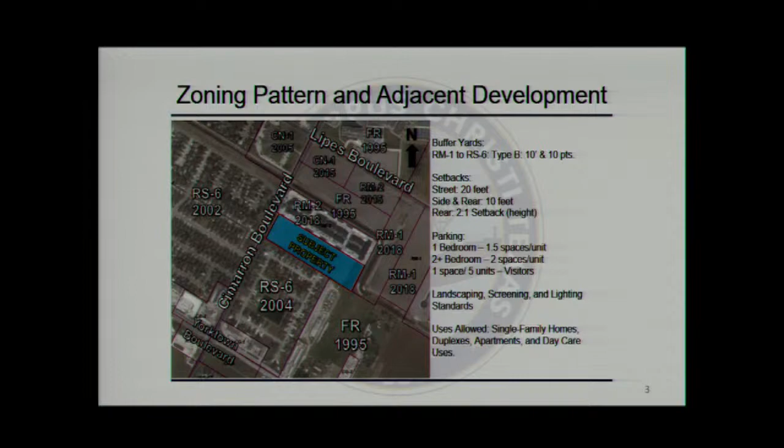As you'll see on the adjacent properties, there were several previous rezoning cases in the neighborhood to some level of multifamily zoning, starting back in 2015. There are adjacents done in 2018, and the most recent is the property to the north, also rezoned in 2018.

As for land use, the proposed future land use is medium density residential. So if Planning Commission recommends, and ultimately if City Council also recommends, it would warrant a change to the future land use map, as you'll see on the existing side, to high density residential.

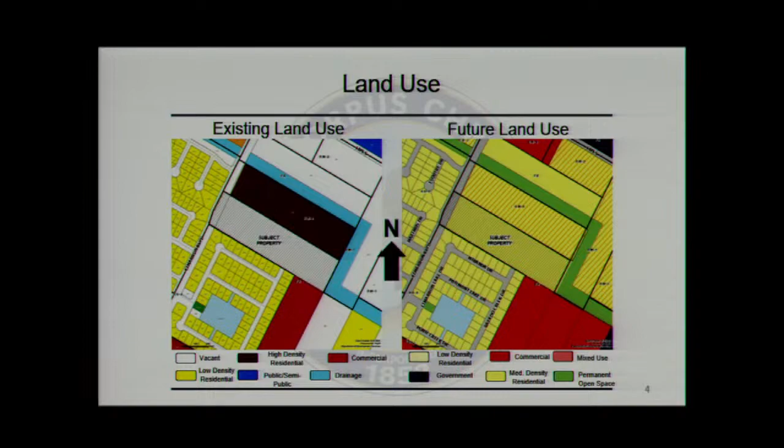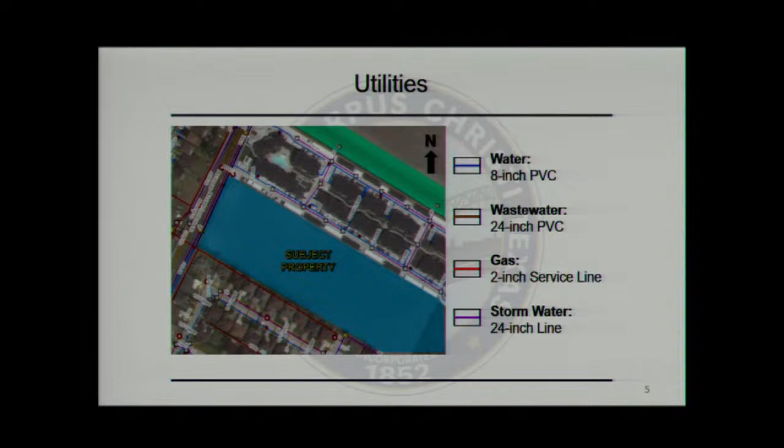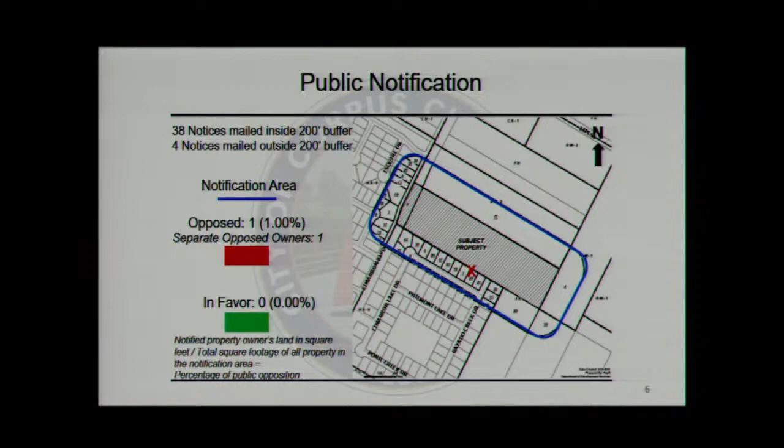As far as utilities, all utilities are available and all are accessible from Cimarron Boulevard. As far as public notifications are concerned, 38 notices were sent out. We received 0 in favor and 1 in opposition as of this afternoon, which consists of 1%.

Based on the information submitted and after staff analysis, we are recommending approval of the rezoning to the RM2 multifamily district. And if there are any questions, I'd be more than happy to address them. Thank you, sir. Are there any questions for staff at this time?

Commissioner Dibble? On the notice, Andrew, that was sent to the residents, I've heard feedback from a few of them that, I don't know what the time schedule is on when they're sent out, but they started getting them last week, and I don't know how quickly people are checking their mail, but have we always had the same timing on what date these go out?

Not this case, but any zoning case in general, I guess. Yes, they're roughly sent 16 days in advance of the hearing before Planning Commission. I do understand there's at times delays with the post office, but it's always the Friday before the packet day. So essentially, winding the clock back 2 weeks, that is the date it's sent to meet the 16-day requirement, which is also set by state statute.

Now, the other thing was, it was brought to my attention, that the time on the meeting was incorrect. Because I'd heard that, I know we have changed this meeting recently to 6:30, but I think what was in the notice was a different meeting time, and I'm wondering, I think that still had the time as 5:30.

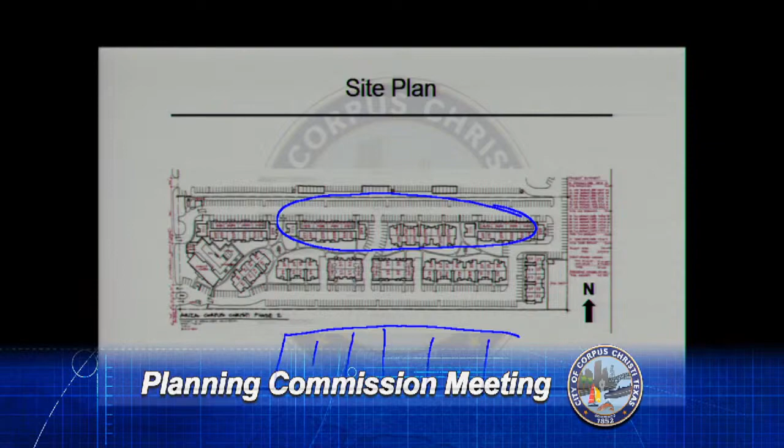60, I'm sorry. 60 is the maximum height for RM2. So as you see on the site plan, the 3-story units at worst are going to be on this section. These are the single-family home lots that consist of Cimarron Lakes, I should say. So you're going to have a separation of parking, and then you begin the 2-story units.

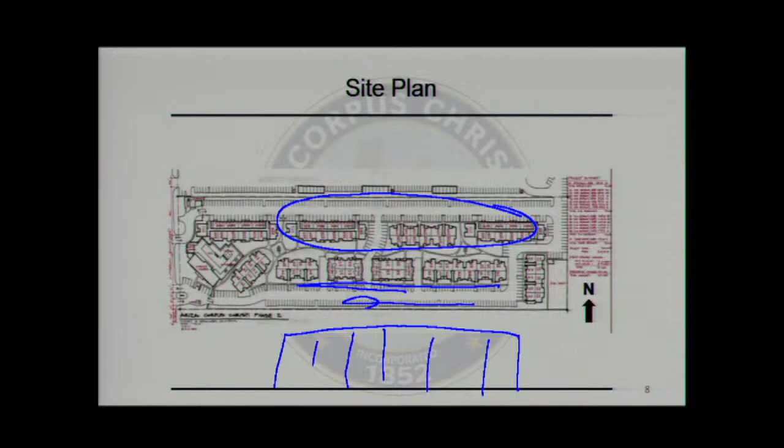Is this proposed plat something that the developer is intending to do, or will there be any changes once they get the zoning, in case they do? This site plan is from the developer, and it does mirror pretty much what was done with the project to the north. There are fewer units.

So how much distance is from the buildings to the property line, where the parking is? So every parking space is roughly 18 feet deep, and your center aisle is going to be 24. So that's, let's see, 36, 60 feet.

Thank you, Mr. Bell. Okay, thank you. Commissioner Dibble? On the site plan though, this zoning case doesn't actually restrict those buildings to be 2-story, correct?

In theory, if we grant the RM2 zoning, they could come back, revise it, and say, we thought we were going to do 2 stories, but now we need to do 3 stories, and they would have the ability to do that. Then they would need to meet those restrictions, or they could sell the site and not choose to build at all. That's an absolutely true statement. Zoning never binds you to a specific site design outside of a PUD or a special permit. In some cases, somebody achieves a zoning, sells the property, decides to go a different direction, or as you said, they may change their design, but that means they will have to meet the 2-to-1 setback.

It sounds like the developer's saying they're going to do 2-story. Could we put a restriction that says no higher than 2-story on the ones that butt up to the property line? It would be only through a special permit. You would essentially have to grant a change of zoning to either leave it FR or RS6 and then add a special permit to allow the use of apartments with certain conditions.

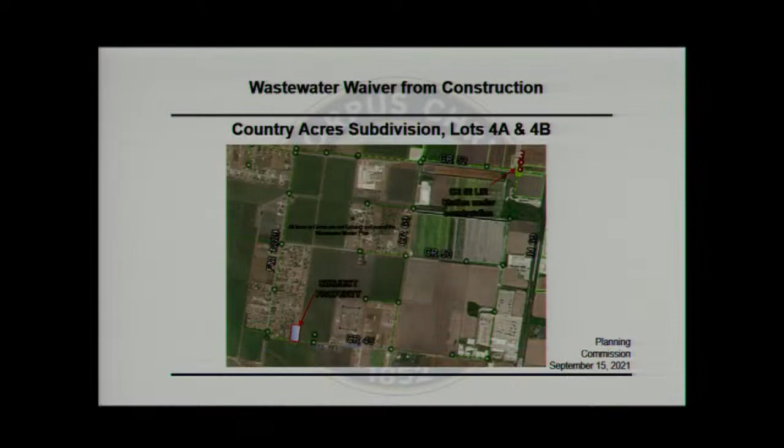The subject property is located in the Calallen area, roughly at the intersection of County Road 48 and Farm to Market Road 1889. The dashed red line is the proposed path to connect to the existing wastewater system that is out there, based on the existing master plan.

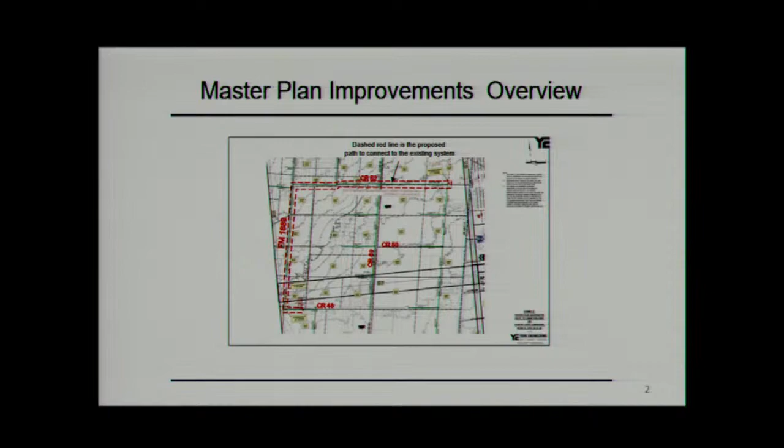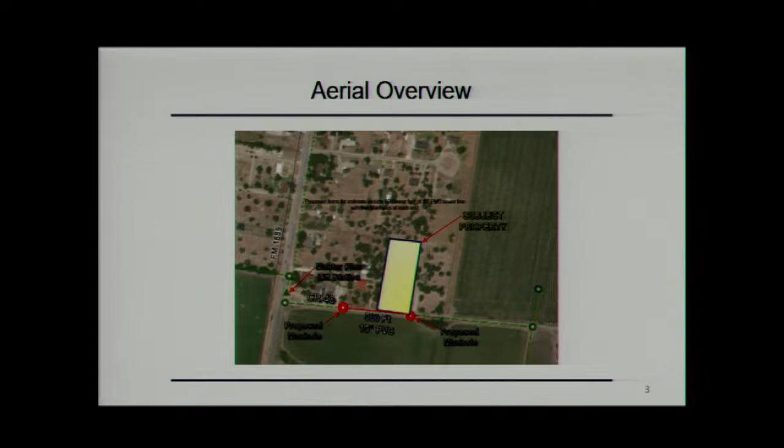The proposal includes 500 linear feet of PVC wastewater line with 2 manholes. It would roughly equate to 500 feet, the red line showing at the bottom of the screen where the actual connections would be made.

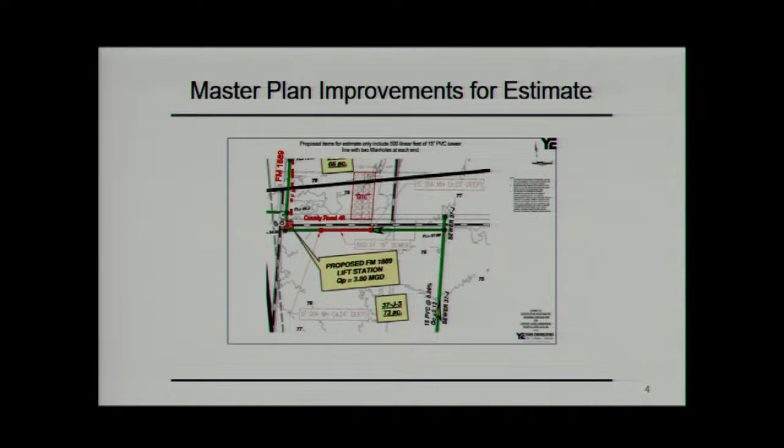As far as the estimate, this is giving the data behind it, including the slopes and maximum capacity. The estimate's hard to read, but it looks like 275,000 in some change.

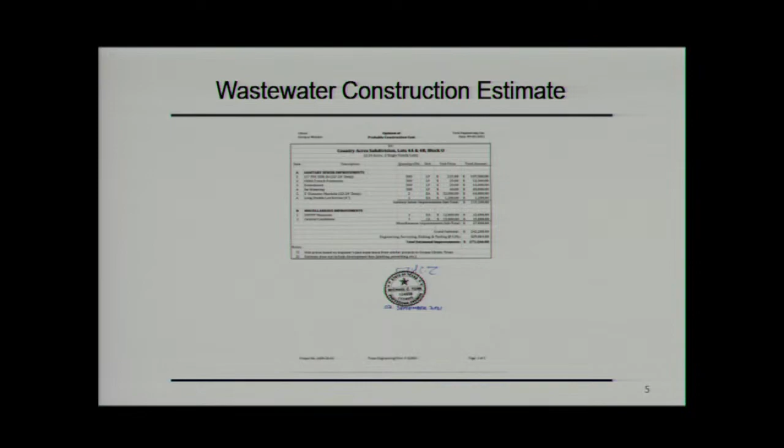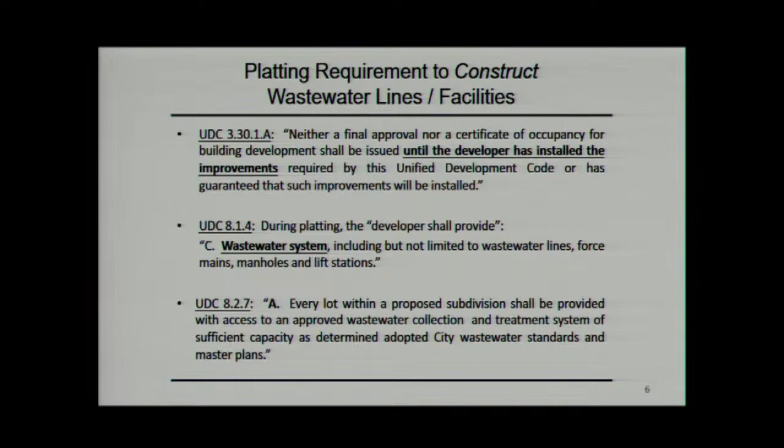Now, the platting requirements—this is text right out of the UDC explaining the options and essentially the findings that have to be met when requesting a potential wastewater waiver, and these are the standards that are accepted. But the term the UDC likes to use is called reasonably accessible, and that's what we like to call the 1,000-foot rule, meaning you have to be a minimum of 1,000 feet away from potentially connecting to a wastewater system for it to be unreasonably accessible.

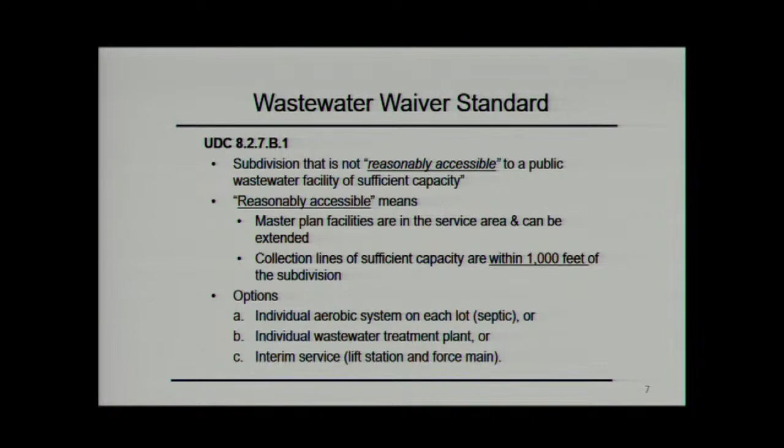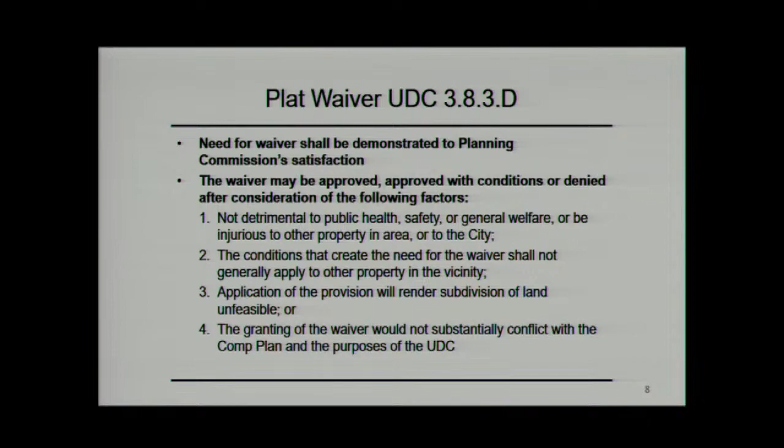As far as what is needed, the waiver specifically for construction would be to the satisfaction of the Planning Commission. This is separate from any potential fee waiver, which has to go through a separate process to City Council. Based on the information submitted, staff is recommending approval of the waiver for wastewater construction, but disapproval for the exemption from fees. Thank you.

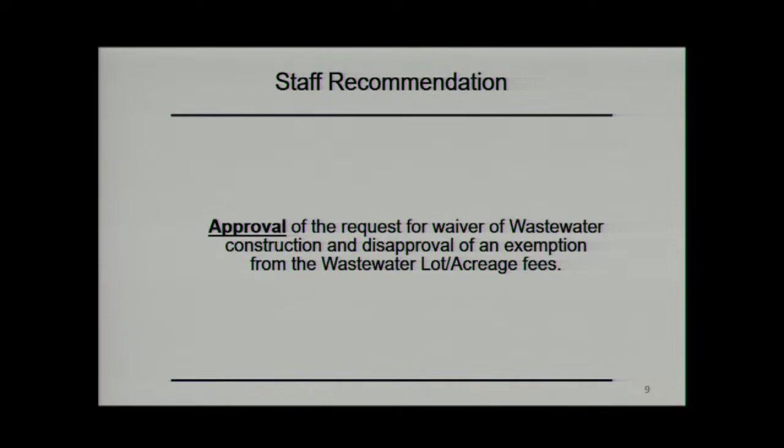If there are any questions, I'd be more than happy to address them. Any questions for staff?

Seeing none, I will open the public hearing for items 16 and 17 at this time. Are there any comments from the public? Seeing none, we will close the public hearing for items 16 and 17 and entertain a motion or further comment.

I'll make a motion that we approve items 16 and 17 as presented by staff, which is a waiver of the construction, but a disallowance of the fees. All right, do I have a second?

I second. I have a motion and a second. All in favor, say aye. Aye. Opposed, same sign. Motion passes.

On to items 18... 19. Permission to proceed. For the record, David Stallworth, Senior Planner. I'd like to introduce items number 21PL 1116 and 21PL 1116 Waiver Request.

This is to accommodate the development of a final plat for Hemingway Townhomes Unit 1 with a corresponding waiver for relief from current sidewalk standards as listed in the UDC.

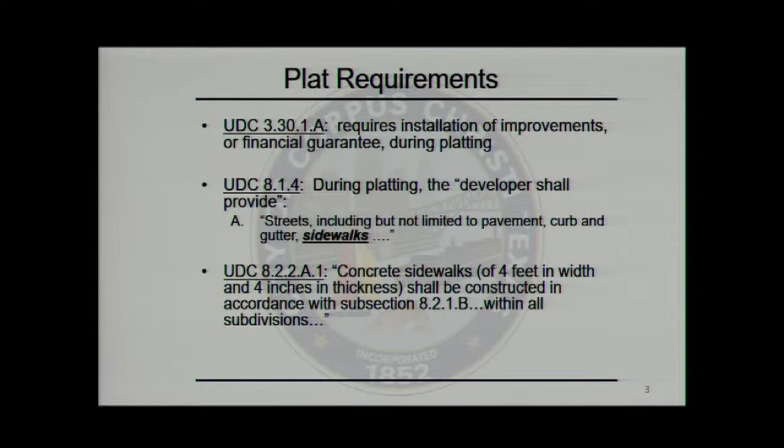This next slide shows you what they can build for a local residential street. There are 2 classifications. One is L1A, which is a 50-foot right-of-way with double-loaded sidewalks and an intervening parkway. The next one is L1B, which also has a 50-foot right-of-way, with 24-foot or 28-foot pavement, and tied sidewalks on both sides.

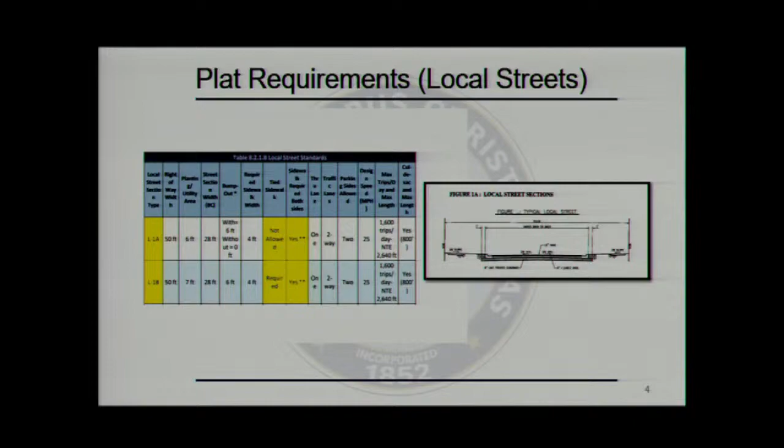These are the proposed cross-sections, which show no sidewalks for the interior residential streets.

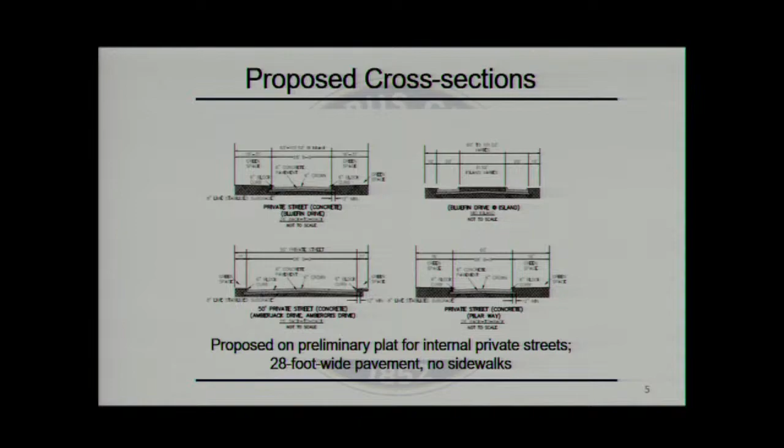In regards to waiver number 2, they're also going to be required to build a 60-foot wide collector, which consists of a 40-foot pavement with double-loaded sidewalks. In this case, they're proposing the same pavement width, but only single-loaded sidewalks, which is going to be on the development side, or actually the south side of the street.

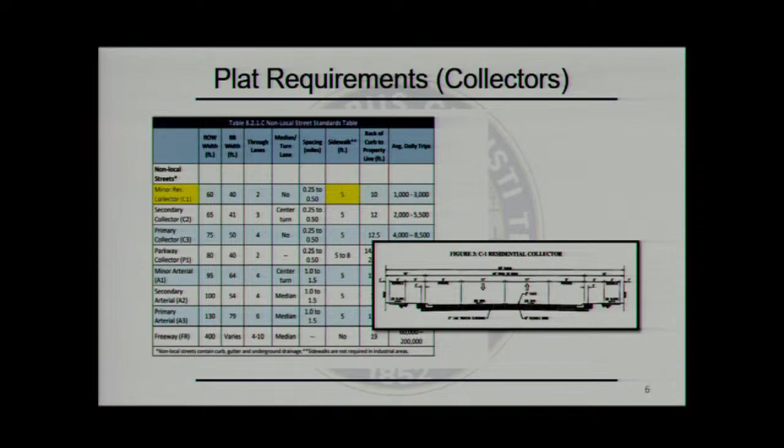This is a proposed cross-section of what they intend to do.

This gives you a street view from the northwest corner of the property, along Greenwood and Silverberry.

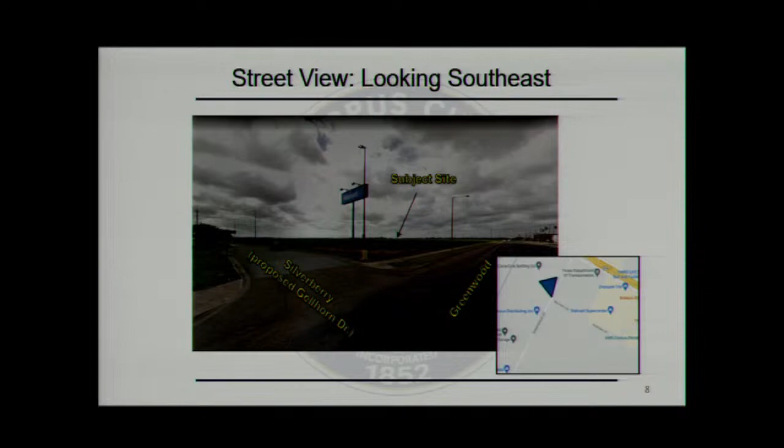This gives you a perspective looking eastward down Silverberry, which is also going to be renamed Gellhorn. This shows existing conditions. Right now you have a TxDOT drop yard on the north side of the property.

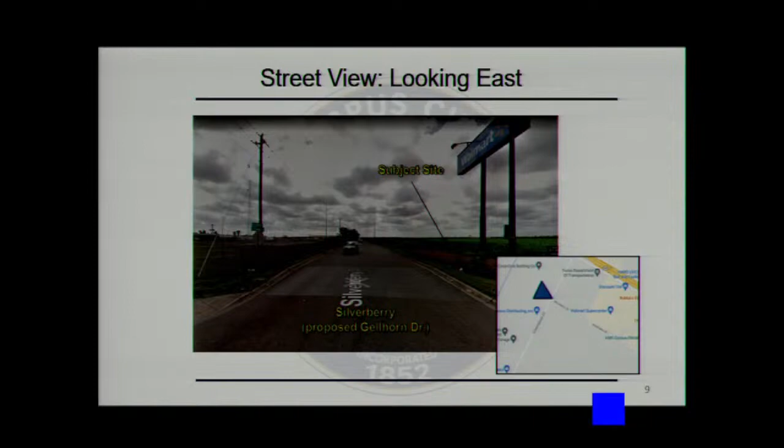You have agricultural land, which is going to be the subject site on the south side of Silverberry. As you go further on, you'll see some buffer trees or buffer landscaping, and within that intervening area, there's going to be utilities, both underground and aerial.

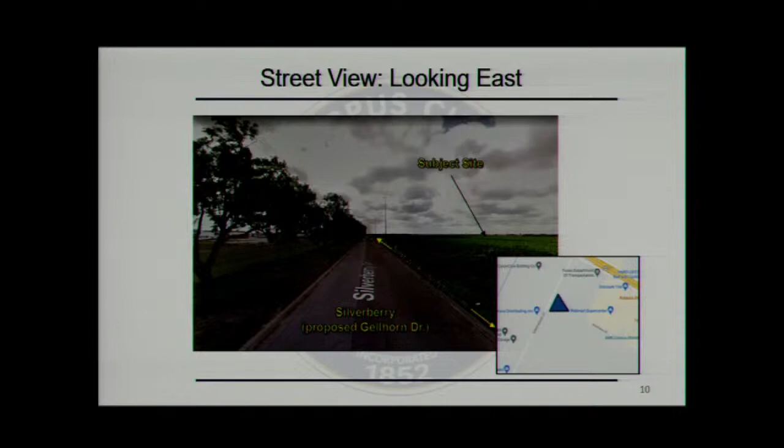The next slide shows you a depiction of what types of waivers they are asking for. Waiver number 1 is for no sidewalks along internal private streets, which are internal, as indicated in beige.

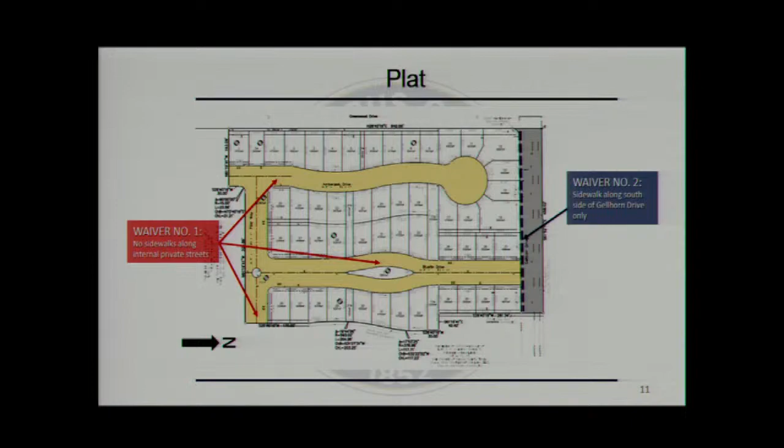Waiver number 2, along the right side of the plat indicated in gray, is a request for a single-loaded sidewalk along the south side of the street.

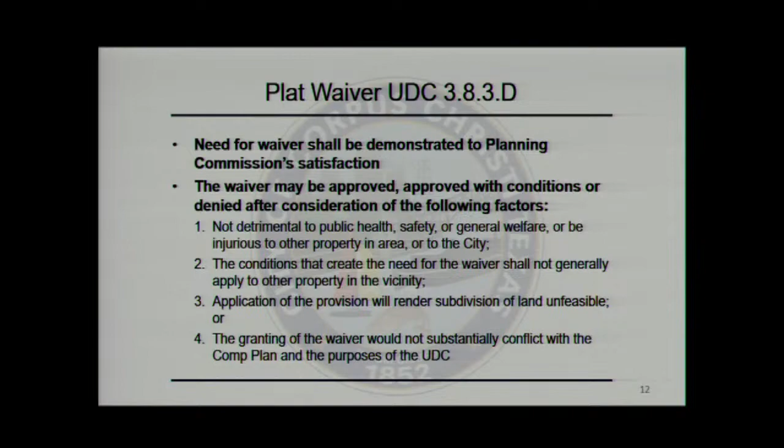In analyzing the application, I would call attention to page 5 of your staff report, which gives the actual letter of justification for the sidewalk waiver request, seeking relief from double-loaded sidewalks for internal streets.

Generally, what they're saying is that granting the waiver is not detrimental to public health, safety, or general welfare; that it would not be in substantial conflict with the comp plan or the UDC; and that conditions creating the need for the waiver should not generally apply to other properties.

What staff has analyzed in looking at that letter is that the applicant provides little to no justification for the request—it's merely a regurgitation of criteria. No details of the gated access to be employed are offered, which is the primary premise on which they're asking for relief from sidewalks. There's also no guarantee on access reliability offered in the letter.

On-street parking, if allowed, is going to force pedestrian activity into the travel lane. The applicant hasn't provided any alternative pedestrian solutions. And gated communities, in this case, are not a unique animal—they're a matter of preference or marketing.

The waiver approval will not guarantee or promote housing diversity as claimed in the letter. It's not going to increase or stabilize investment capacity. And we also believe it's not going to encourage community identity or placemaking, especially if the premise is to provide affordable housing—which generally isn't something you find in gated communities anyway.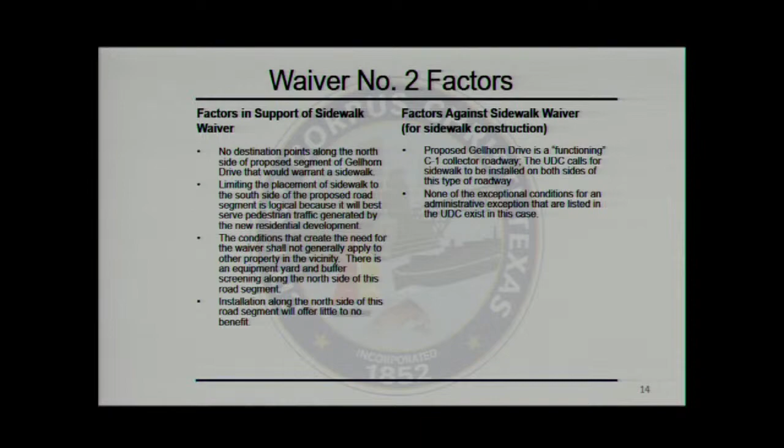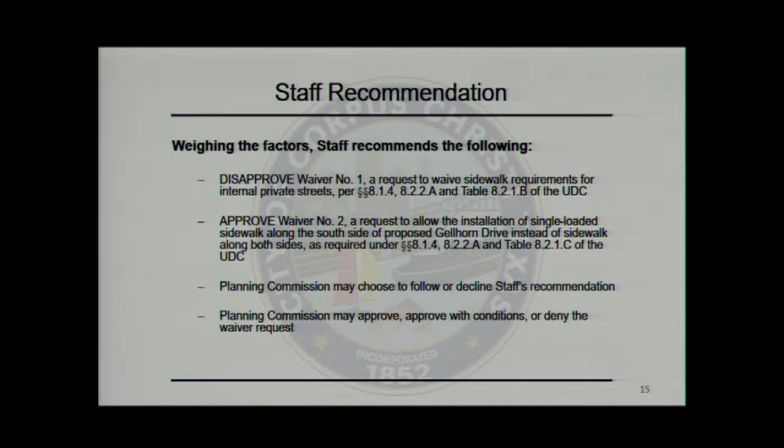Based on the factors that we've analyzed, we recommend disapproval of waiver number 1, and we recommend approval of waiver number 2. That concludes my presentation. Are there any questions? Thank you.

Any questions for staff regarding items 18 and 19? Just a confirmation that the one staff's recommending approval on is the single-loaded sidewalk on the collector? That is correct, yes sir.

Commissioner Miller: Could you go back to the slide illustrating waiver number 2, please? This one right here, sir? The illustration of the drawing.

And right now, there's some canopy trees, some buffer trees that are planted in that landscape median. That is correct. Could you go back to the picture of that? It's really hard to see because it's dark.

Second, why we felt it wasn't really necessary is because the proposed sidewalk is going to be on the development side, which is going to be more beneficial to people actually living over there. Whereas on the north side, you have semi-industrial use, buffer landscaping, and all the utilities already existing there, both underground and aerial. So we figured with the amount of investment needed to install a sidewalk versus the amount of public benefit that would occur, it wasn't practical.

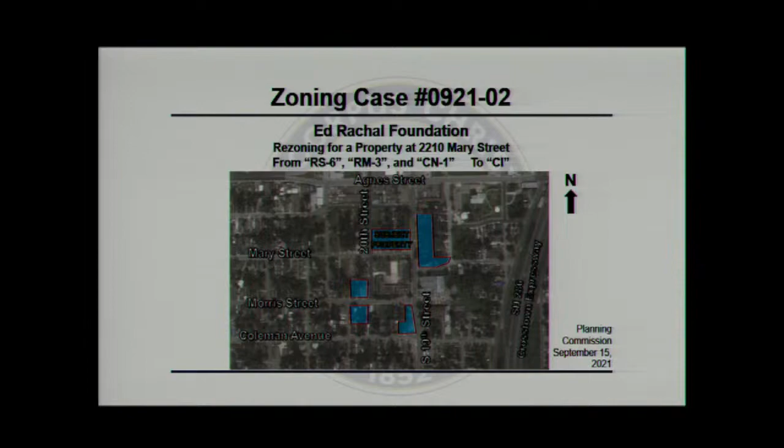Our final presentation of the evening is the Ed Rachal Foundation, a rezoning from the RS6, RM3, and CN1 districts to the CI Intensive Commercial District. The property is located in the older part of the city, west side, just west of the Crosstown Expressway, State Highway 286, south of Agnes Street, and they are small properties that wrap around the former Lamar Elementary School.

Now, the request for the rezoning is for the purposes of constructing small parking lots to serve the city offices that are going to be moving into the Lamar Elementary site. Those are both Corpus Christi Police Department and Metrocom, which is also known as your 911. When you call them, those are the folks that answer, and a few engineering offices are going to be moving in as well.

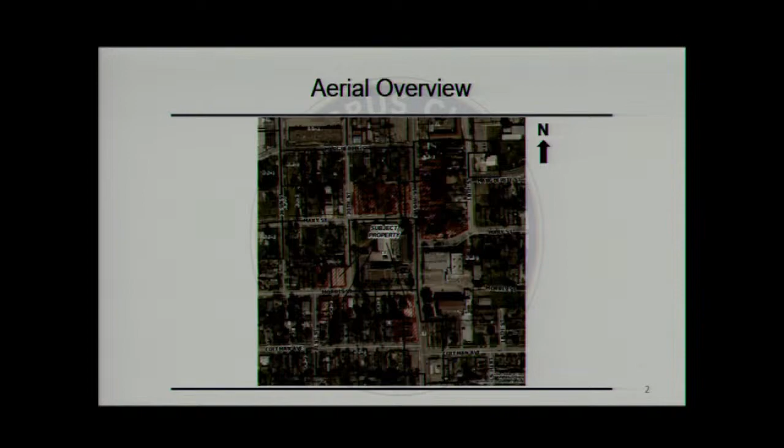Now, considering the zoning pattern and adjacent development, you do have a mix of surrounding land uses. There are both vacant lots and some existing single-family homes, as well as St. Joseph's Church to the east. As you can see, there is a mix of both the old RM3 zoning.

Dating back to 1947, and then you have a series of RS6 rezonings that happened in 1980. For those that were on the commission at the time, there was a rezoning down the street as well as the Lamar rezoning a few years back. The reason there's such a drastic difference between the establishment of RM3 in '47 and 1980, why there was such a large rezoning is...

At the time, taxes were being assessed based on this entire area that was zoned RM3. So the neighborhood got together, down-zoned most of their area to RS6 in order to get back to single-family taxing from the appraisal district versus multifamily. That's why you see a series of 1980s rezonings.

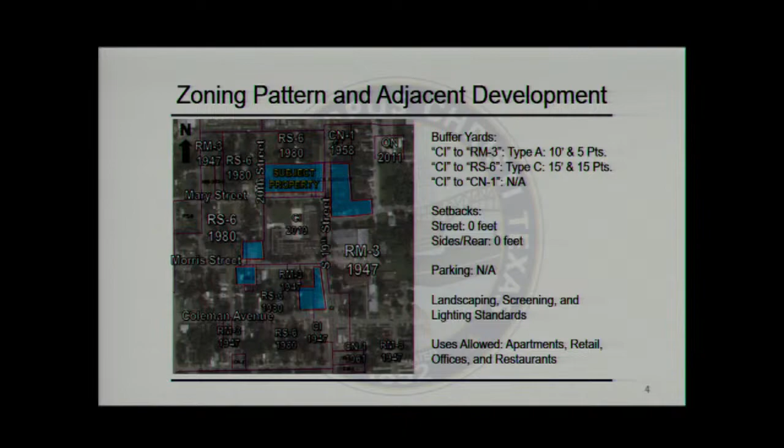As far as existing versus future land use, the existing land use is public, semi-public, since it is a former site of a school. You have a mix of vacant lots and single-family homes that are in the process of being demolished.

On the future land use, at the time the future land use was adopted with Plan CC, this was still mostly single-family residences, so that is why you see a mix of medium density and high density residential. In this case, the Lamar site will actually convert to the same blue color to represent a government or institutional use.

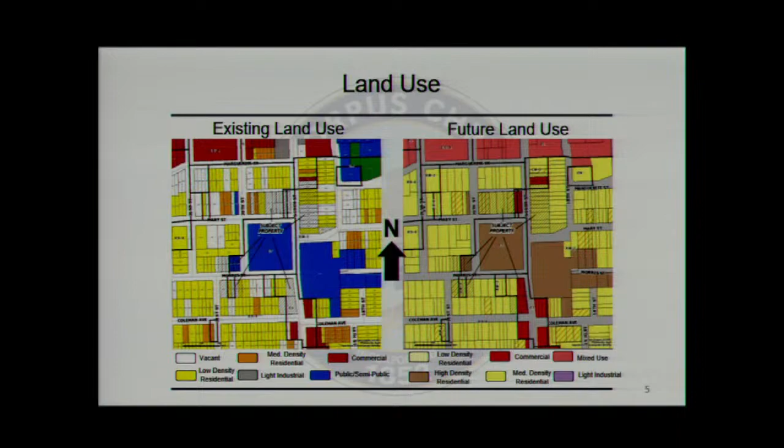As far as utilities are concerned, since it being parking lots, there's not going to be a high demand for utility service to these sites outside of irrigation that'll be for the landscaping to be installed.

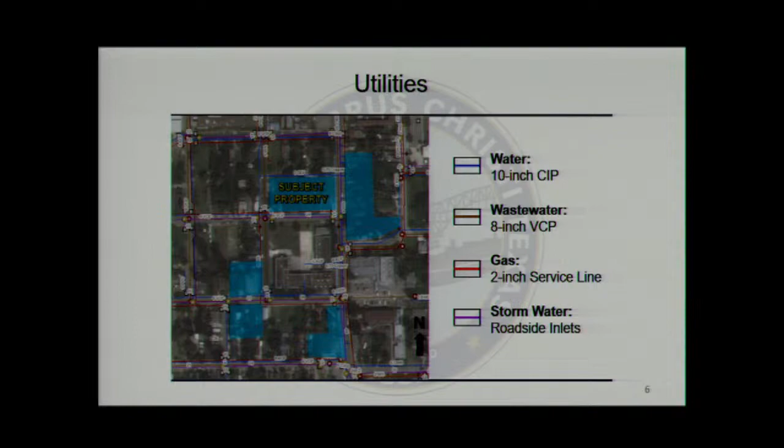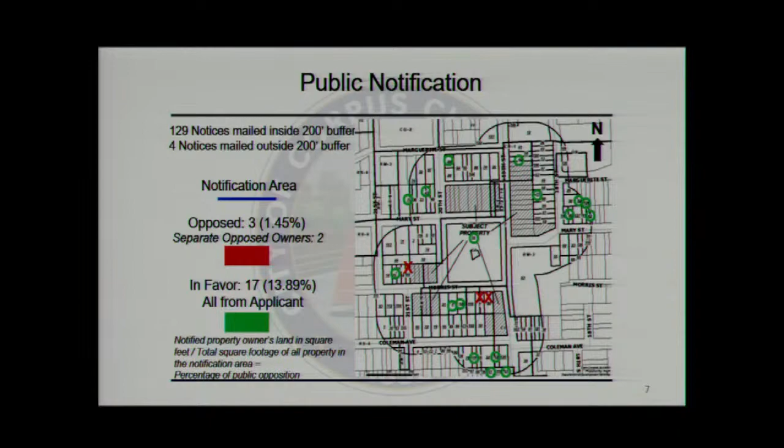Now, as far as public notices that were sent out, we sent out 129 notices. 17 were returned in favor, of course from the applicant, and you had 3 in opposition from 2 separate owners, which essentially equates to 1.45%.

Now, as far as staff is concerned, we are recommending denial of the CI district, in lieu thereof recommending a special permit. That special permit will have a series of conditions. The only use that'll be allowed is the accessory parking lot for a government facility. We are requiring landscaping, vehicular screening along the rights-of-way. There will be a required buffer yard.

They must meet the same lighting standards as the rest of any type of commercial development, which we do treat parking similar to commercial, meaning the maximum height of any light standard is 15 feet, so you cannot have a 30-foot pole light right next to your residential properties.

Items 6 and 7 are standard language that we apply, consisting that your special permit is not a get-out-of-jail-free card. You have to abide by all the other requirements of the UDC, fire codes, and building codes. Lastly, the time limit, if things aren't getting underway within 24 months, the special permit will expire. Or if the use ceases to exist, 6 months after that, the special permit will expire. That is to protect the underlying neighborhood, so they will keep that RS6 zoning.

And you'll probably see the same special permit for the previous case.

Awesome. Thank you. Any questions for staff regarding item 20? Commissioner Sheldon... Schrader, sorry.

I wasn't quite sure from the plan exactly how this would work. I was trying to envision what this use is. So you have the occupied facility that's attended here, is a call center, correct? It will be a combination of the existing Lamar facility, which will have the call center, Metrocom, and CCPD, as well as offices for engineering services and a couple for parks.

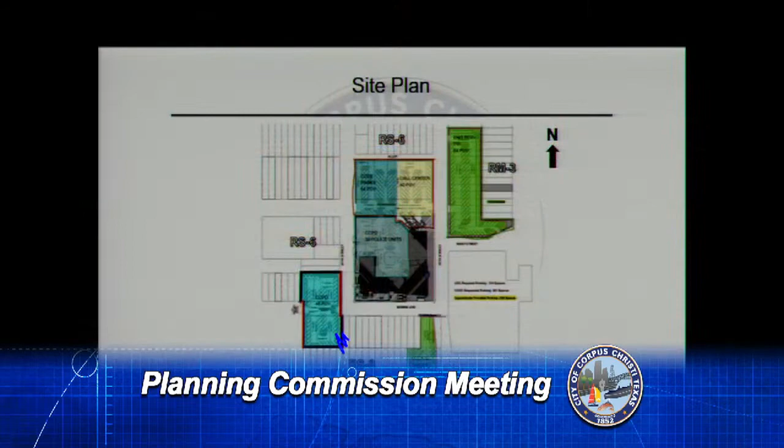So let's say you live at a house here, just for example. The fence that they're talking about will wrap around the perimeter, but will not build on any of these properties. It's just to say that this property will now have shielding or screening, what we call, from any adjacent property. Similarly to the project down the street, there will be a fence that wraps around and shields these areas from the adjacent properties.

And it will only be in the colored areas, the green, the blue. Those are the only lots we're considering today. So if you're right next to that lot, yours is not part of it. I can't tell, there's no addresses on here, so I can't determine. I know that on the deed it says it's lot 10, but it's not even labeled on here, so I can't determine. This is Morris Street that runs right through here, and this is St. Joseph's here, and this is the former school site in the middle.

So if you're along one of these properties, that is where either you won't have screening at all since you're not adjacent. Only the properties adjacent will be required to have a fence, and the foundation will be building the fence.

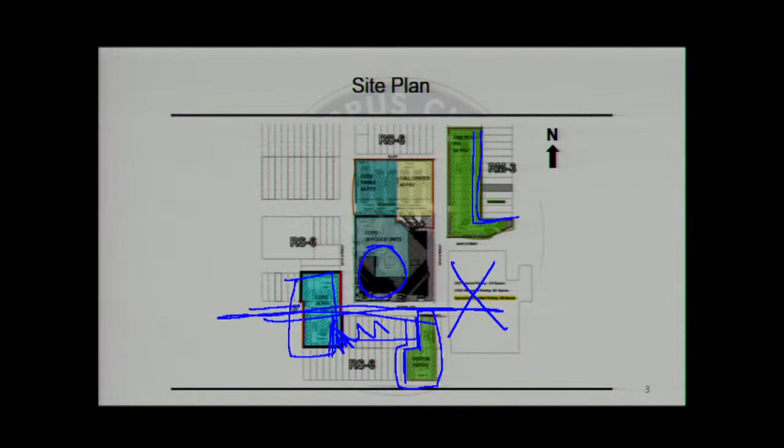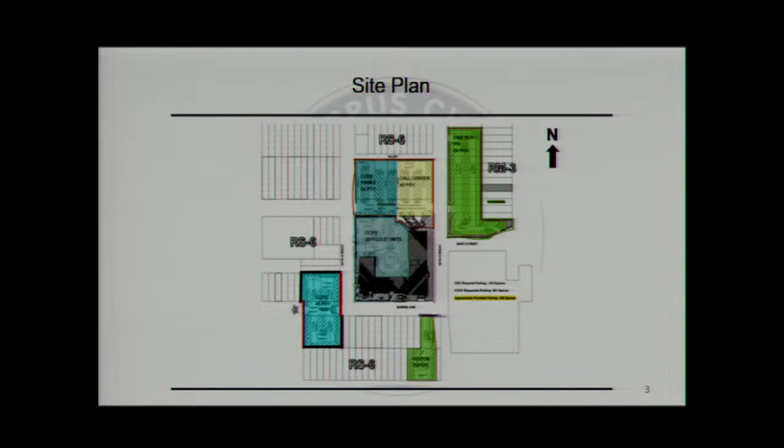And how do I stop them from impeding or going already onto the property and stuff like that? I would imagine pulling code enforcement or law enforcement into it, but I don't think... I would understand that they would be developing onto their lots, but if you do have concern with that, code enforcement, even law enforcement, can come out there and help you stop that.

Okay. And we'll hear from the owner, the applicant, in a second. He might be able to speak to that. Okay, thank you.

And that's what I explained to them, and they said that they would get a survey out there to kind of just nip it in the bud. Stake it, and mark it, make sure it happened. So, yeah.